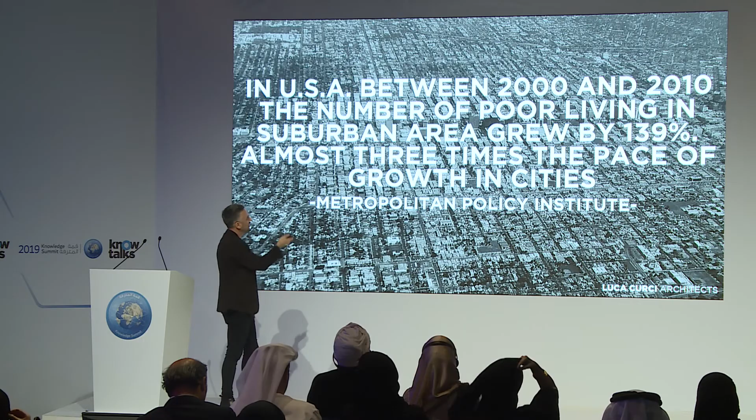Cities, in terms of dimensions and site, occupy only 2% of our planet, only 2%. 98% is nature. But with this 2%, we used our resources, all the planet's resources, in only 6 months. We have to think about many ways to change the system and to live in a more sustainable way. Today we will talk about only one of these steps, sustainable cities and communities.

Today the situation is this: 70% lives in suburbs, 30% moves and lives in the center, and sometimes moves for work or for meetings. That's the situation. It's really important that you see this simple design, because you can understand what we created. If you think that many cities are more than 100 kilometers long, it's impossible for two people who want to meet in the center to meet every day, because they have to travel a lot.

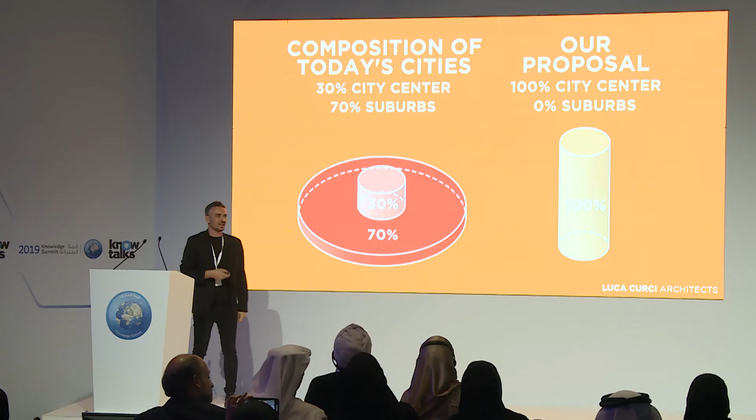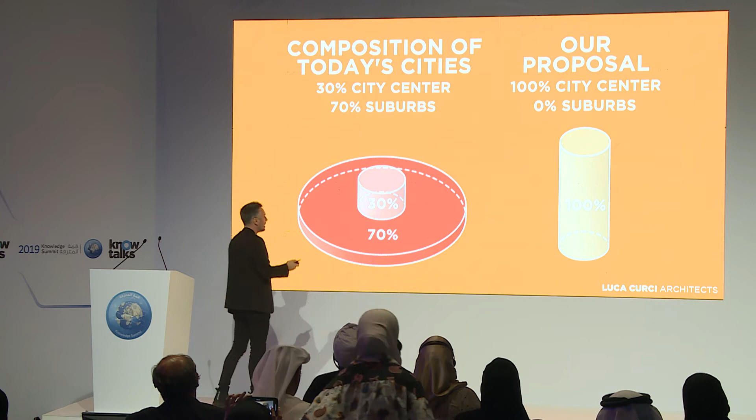It's incredible. What we are proposing today is a new way of thinking about daily life, and a new way of thinking about cities in a vertical way. The project talks about a lot of green areas, because if you analyze today's skyscraper system, they are vertical towers without green. They are shaped by iron and glass, but they don't have inside any kind of green areas, and they are not sustainable at all.

Our system works with solar panels; it is shaped by solar panels all around, and not only on the floor. It uses other kinds of energy, like wind, like water, and inside the building there is a desalination system that brings water from the sea. Now you will see some pictures of it.

And this tower has inside, again, the social life. So new communities will be recreated again, because, as you can imagine, the purpose of this project is to solve the problem related to climate change, but also to work and think as a reflection on our community life.

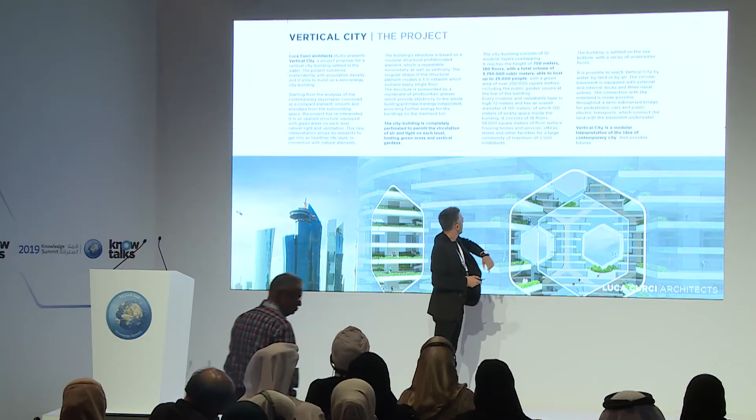The project is made by these shapes. Each hexagon has 10 floors, and on each level, as you can see, there is green. There are common areas on the ground. Now I will show you these areas. And there is wind that can go through the tower.

So the tower will have sun everywhere, wind, and all other renewable energies that will work together to make this kind of system possible. This kind of solar panels will be all around, because we found a company that creates this kind of solar panels that can shape the skyscrapers, but at the same time they can work as glass. So they have a double function, but the sustainable function will work to create much more energy.

This kind of building is self-sufficient, and it is able in some periods to create more energy, and with a big energy storage system, we will be able to have energy for other periods in which it will be less, or to sell. So from an economical point of view, this kind of system creates energy.

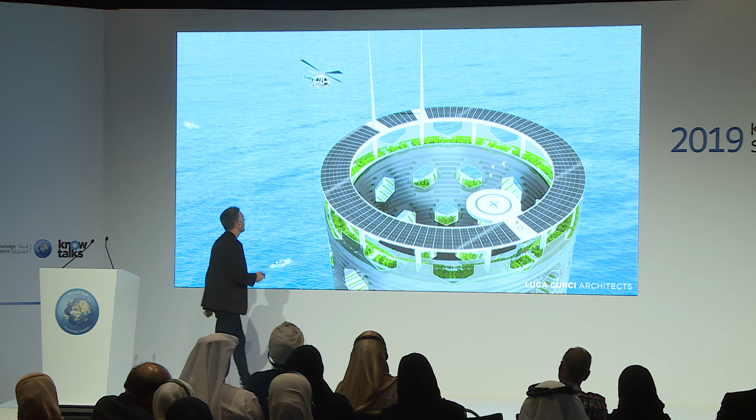This is how one of the ideal towers can be. It's 700 meters high. So it's not so much compared to many towers in the world. And it's composed of 180 floors. And each of these modules is made by 10 floors.

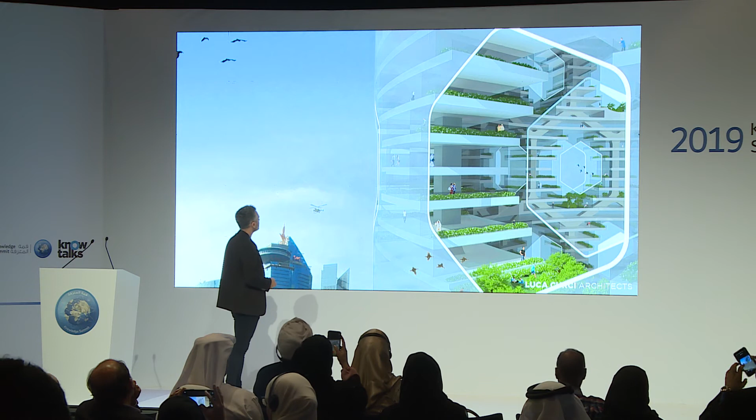Inside this tower, which is possible to reach by air and by water, you can find any kind of everyday life needs. For example, there are religious areas, common areas, green areas, market, and everything you need in a smart way. Okay, here you can see in more detail what the situation can be on each floor. And this is the idea of the garden.

The other problem to solve is related to farming. This kind of system will have inside a self-farming system. The farming system will provide fresh food to the citizens of this tower, of this vertical city, and it will be one of the sustainable ways to create a circular economy in which everybody living here will not produce waste. We are trying to arrive at zero waste production.

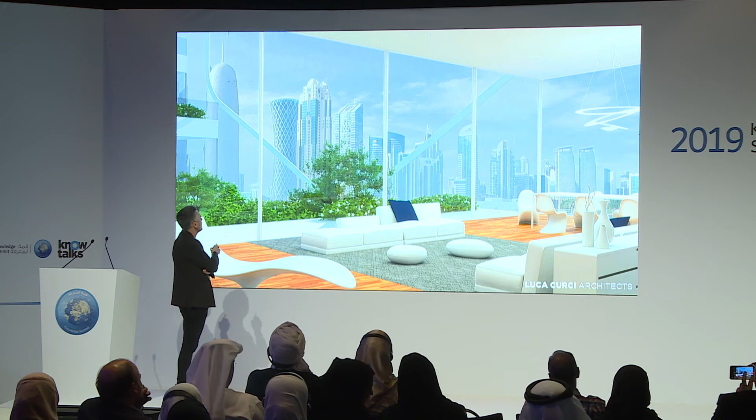Okay, some interiors about the views that you can have, and naturally it's only an example. The common areas, as I told you, in which you can have running, meetings, and relax yourself. Think about this kind of system. It's not so difficult to think of and to create.

Think about having many skyscrapers, as you have in many cities in the world, and if you think to connect all of them, if you take groups of skyscrapers and you connect them with rings every 10 floors, you will create again communities at different levels. So it's against the contemporary alienation in society, and at the same time, it will try to be an independent city in which the energy production will be completely self-done.

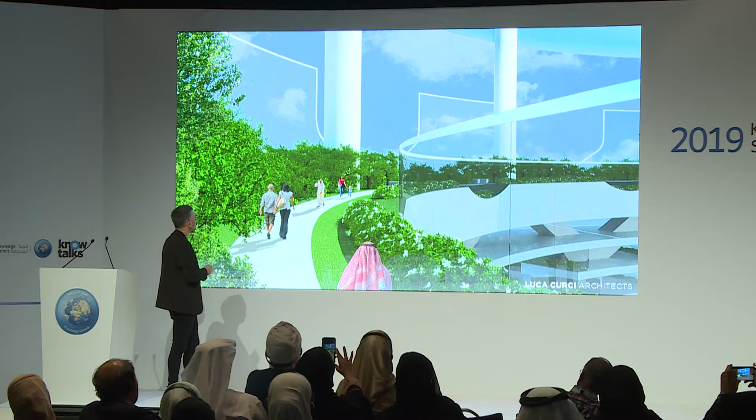From the technical side, the structure is made of steel and is composed of a modular system. As I told you, there are many of these modules that create this 3D network, and this 3D network has floors. The shape is empty in the center, so the tower is completely ventilated. It's a 3D network of this modular system in which wind, air, and light can enter everywhere.

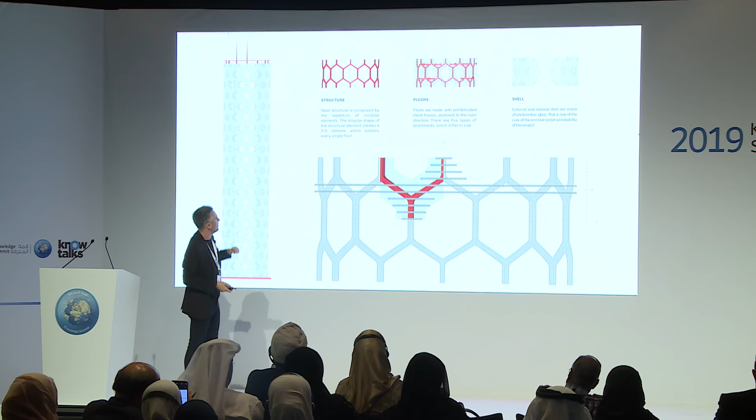Because one of the other problems of towers now is that many apartments don't receive much light, and living inside a skyscraper can be not so simple. We have, in this case, not an apartment, not a duplex system of apartments, or normal residences. We have here independent situations like villas, but at different levels altogether.

Here there are some examples of apartment floors and covered areas with the balcony area and green area at each level. This is only half of one module.

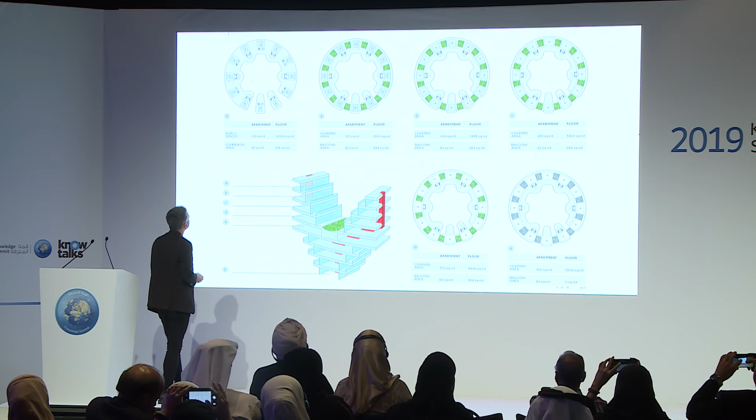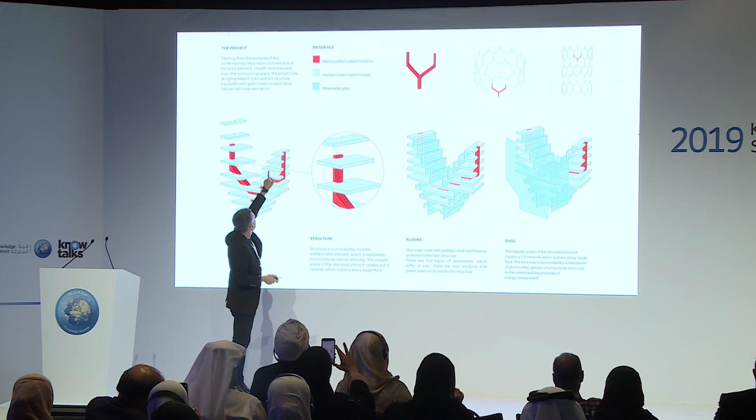As I was telling you at the beginning, here there is the photovoltaic system, the solar panels, that shapes the entire tower, and that shapes all the inner sides of the tower, creating this 3D network and producing energy. All the materials that compose this tower are prefabricated in steel and metal. And it's really simple to create and to set up.

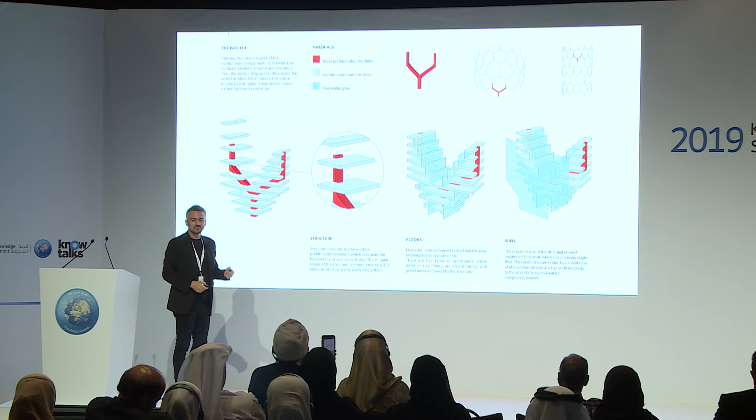And simple, smart living inside. It's a healthier lifestyle inside too, because if you are surrounded by fresh air, green, and peace, and you have a community around you, I think it will be better. And if you have less stress to move every day, only for, as I can show you later, business meetings or for your pleasure, it will be more simple.

The urban system talks about this tower integrated to other towers, in which we created other purposes. The main tower I talked about now is a living system. So we can live inside and we can have everyday life. But moving for work, moving for business, or moving for pleasure will be inside the structures around the main one.

And so, this is the tower we just saw now. I presented the first one, that is the circular one in the center. We have other 3 towers and 3 structures as moons. This kind of system brings more than 100,000 people. This kind of system works in a simple way. You can move inside this system by air and by sea, by water, and you can connect easily between the residential area in the center to the other areas.

The other 3 towers that I will show you in the next pictures work as offices, universities, hospitals, and everything related to a better life. So people living in the center, in the tower, can move to the other towers every day and just go back in a simple, really simple way.

The moons will host holiday purposes and pleasure places like a spa and wellness areas, gym and yoga, and some of them will have a beach on the water to relax yourself.

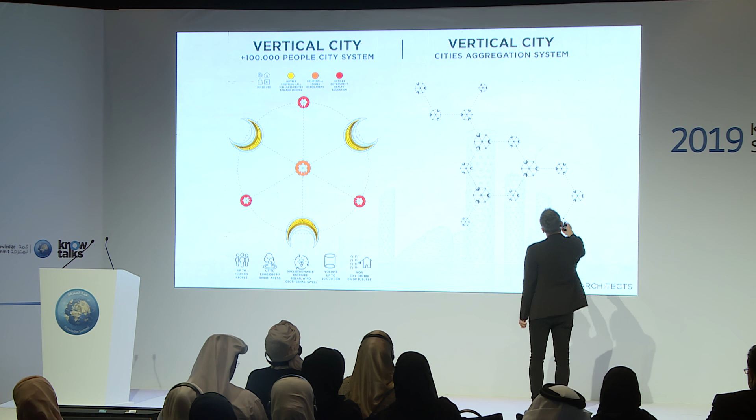This drawing talks about the interconnected system of all these towers and this urban system of vertical cities. They will be connected between them by water and by air, as I told you, and they will permit the increasing number of citizens, and they will solve many problems that we talked about at the beginning.

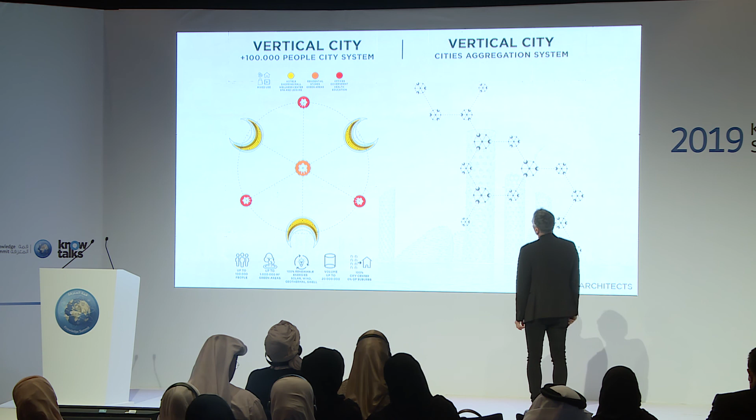What I want to tell you today is that with this system, we are only giving you a suggestion about future possibilities of living in our cities. And with my office, we are developing other smart ideas about this, with many more concentrations of citizens in different structures, but all the other projects are based on the same idea that we will try to reduce poverty and create smarter and more efficient cities.